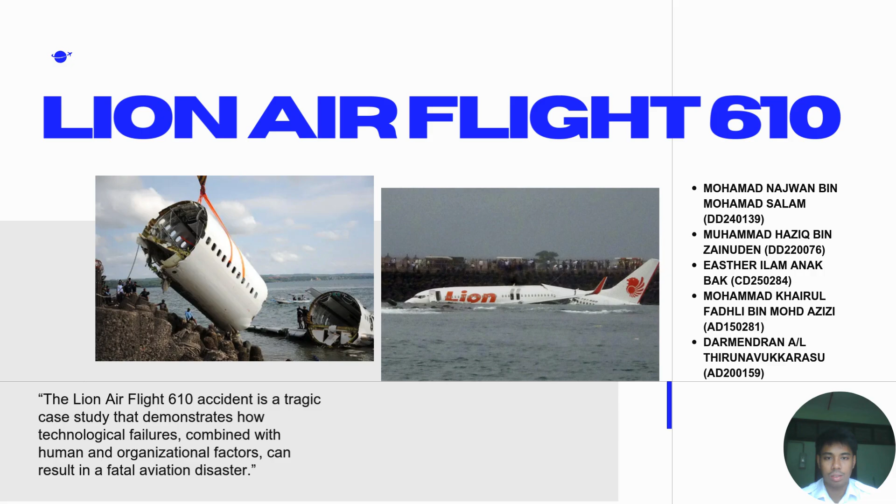DD220076. My group will be presenting about an aircraft incident related to aircraft system malfunction or problem. The topic we will discover is the Lion Air Flight 610.

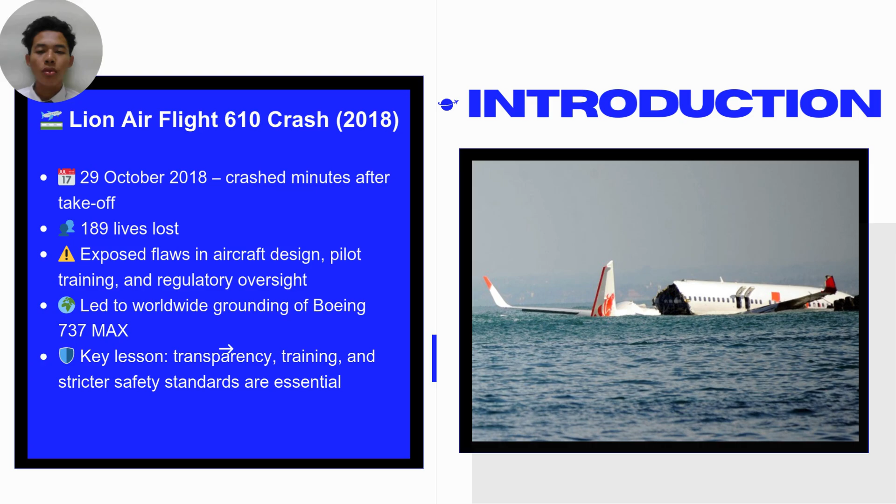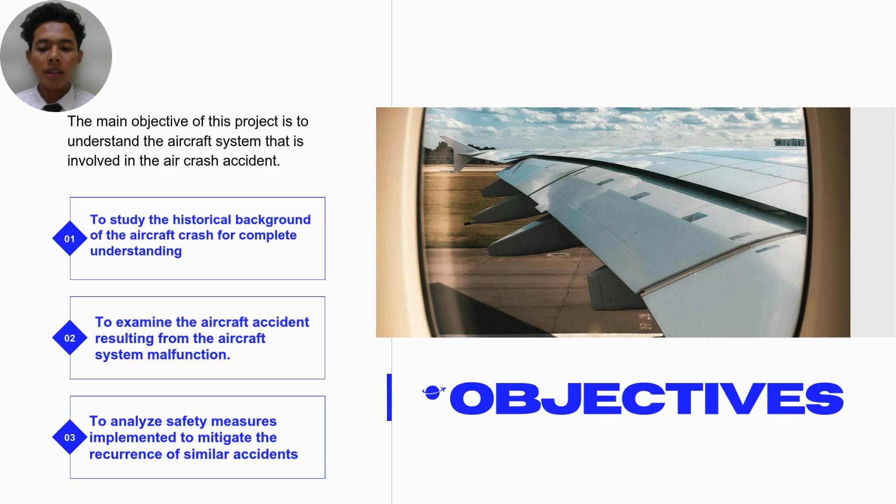The purpose of this project, or the objective, is to understand the aircraft system involved in this aircraft crash incident. First, to study the historical background of the aircraft crash for complete understanding. Secondly, to examine the aircraft accident resulting from aircraft system malfunction. And lastly, to analyze safety measures implemented to mitigate the recurrence of similar incidents in the future.

Now we're talking about the history of the airline, which is Lion Air. For the airline background, it was founded in 1999 and operations began in 2000. It is a low cost carrier (LCC), and it was one of the biggest low cost carriers in Southeast Asia. Its network went from high frequency point-to-point routes, focusing primarily on domestic with some regional and international routes.

Let's talk about the safety and operational history pre-Flight 610. Lion Air had recorded multiple safety related incidents: runway excursions, hard landings, and recurrent technical issues, especially in the AOA sensor. These incidents drew attention from multiple aviation authorities, raising concern over maintenance quality, crew training standards, organizational safety culture, and regulatory compliance. Compliance was maintained, but operational risks persisted.

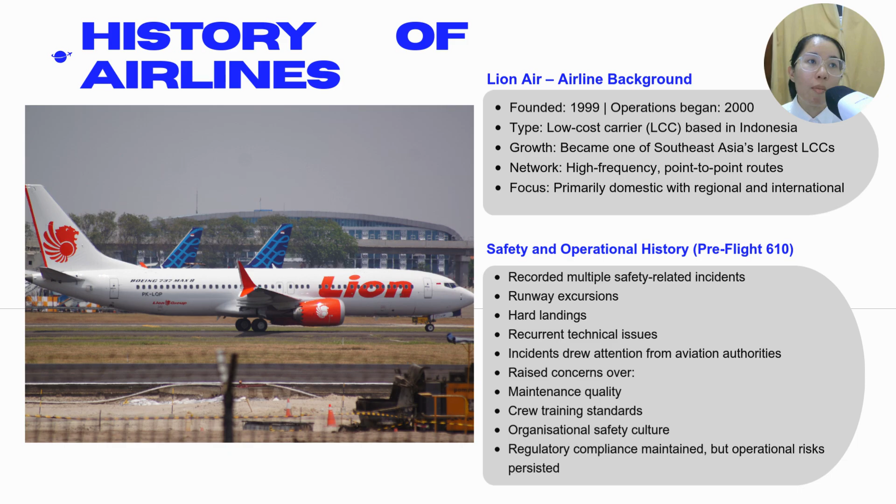Speaking of the AOA sensor, the angle of attack sensor, it was replaced prior to the accident. Before the accident, the AOA sensor was already experiencing multiple technical issues, so they replaced it with what they thought was a new one. It was actually an old one that was refurbished. The replacement sensor was supplied by Xtra Aerospace from the US, and investigation found the sensor was likely miscalibrated before installation.

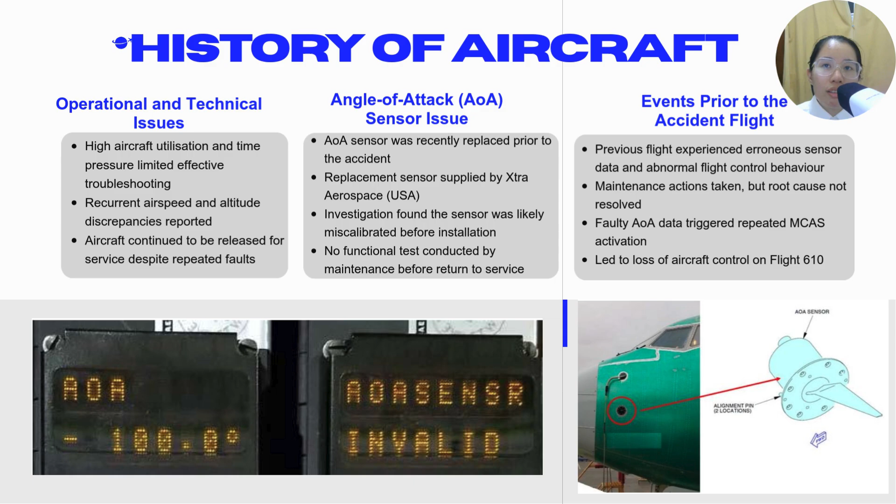When they were supposed to constantly check the sensor and calibration because of too many faulty issues. Now, events prior to the accident flight: the previous flight experienced erroneous sensor data and abnormal flight control behavior. Maintenance actions were taken, but the root cause was not resolved. They just tried to fix it overnight and ignored a lot of steps to ensure the AOA sensor was fully functional. The faulty AOA data triggered repeated MCAS activation, which led to the loss of aircraft control on Flight 610.

For this section, I will discuss the main causes of the Lion Air Flight 610 crash, focusing on the system failure, human factors, and organizational weaknesses.

The first and initiating cause of this crash was the faulty angle of attack, or AOA sensor. The AOA sensor installed on the aircraft had been incorrectly calibrated after maintenance. As a result, it continuously transmitted false high angle of attack data to the aircraft system. This incorrect information misled the flight control system into believing the aircraft was approaching an aerodynamic stall, even though it was flying normally. The faulty sensor input became the starting point of the accident sequence.

This leads to the malfunction of the Maneuvering Characteristics Augmentation System, or MCAS. This system was designed to automatically command nose down stabilizer trim when a high angle of attack is detected. Due to the faulty AOA sensor, MCAS activated repeatedly and unnecessarily, each activation trimming the aircraft nose down and forcing the pilots to continuously counteract the system. Despite their efforts, MCAS kept reactivating, progressively reducing the aircraft's controllability and contributing directly to the crash.

Another critical cause of this crash was a single sensor dependency in the system design. MCAS relied on the output of only one AOA sensor at a time, without cross-checking data from the second sensor. This lack of redundancy meant a single sensor failure was enough to trigger repeated incorrect system actions. In aviation safety design, critical systems are expected to be fault tolerant, and this absence of redundancy significantly increases the risk of catastrophic failure.

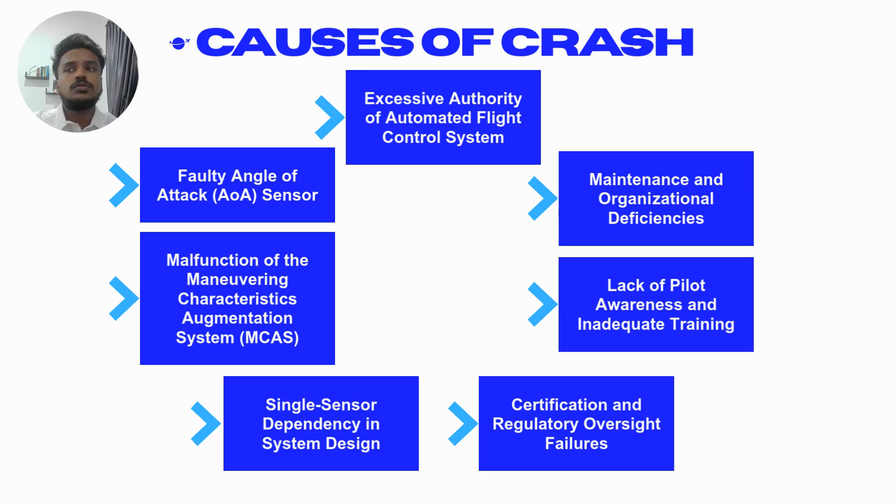Next, we will go through the actions, regulations, or safety practices that were ignored or violated during the crash.

The first one is MCAS omission from the manual and training, which is one of the most significant failures. Boeing did not disclose the existence and detailed operation of MCAS to the pilots. According to the investigation, pilots flying the 737 MAX were unaware of the system. Since they didn't know the system existed in the first place, they could not interpret or deal with its behavior effectively during multiple inadvertent activations. They didn't know how to react when the system took control of the aircraft. This omission violated the principle that pilots must be fully informed of critical flight control systems and how to handle their failures.

The next one is over-reliance on a single angle of attack sensor. The original MCAS design relied on just one AOA sensor, where safety standards generally require redundancy for systems whose failure could lead to catastrophic outcomes. Yet MCAS was certified without such redundancy. As we all know, in aircraft construction redundancy is important because if one system fails, there is a backup system that can activate to prevent a crash or serious incident. The certification process accepted this despite widely understood safety engineering practices favoring multiple sensors for critical functions. So this is clearly a violation.

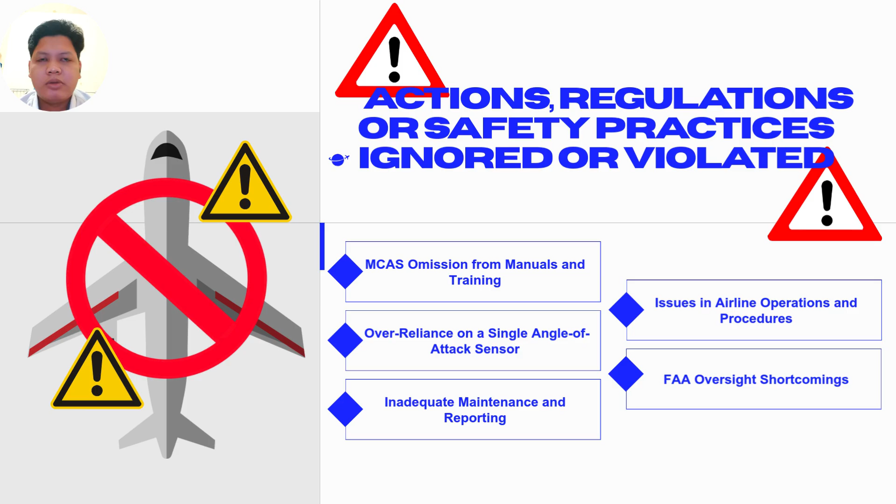The last one is FAA oversight shortcomings, where a review report found that FAA's oversight during the original 737 MAX certification process was inadequate. In particular, the agency delegated much of the certification work to Boeing through its Organization Designation Authorization (ODA) program, and the FAA didn't fully understand MCAS behavior, even though engineers eventually realized its potential hazard only after the crash. So there's also a part of the FAA that caused the crash, where the FAA did not fully understand the MCAS behavior, and yet they still approved this aircraft to be certified for operation.

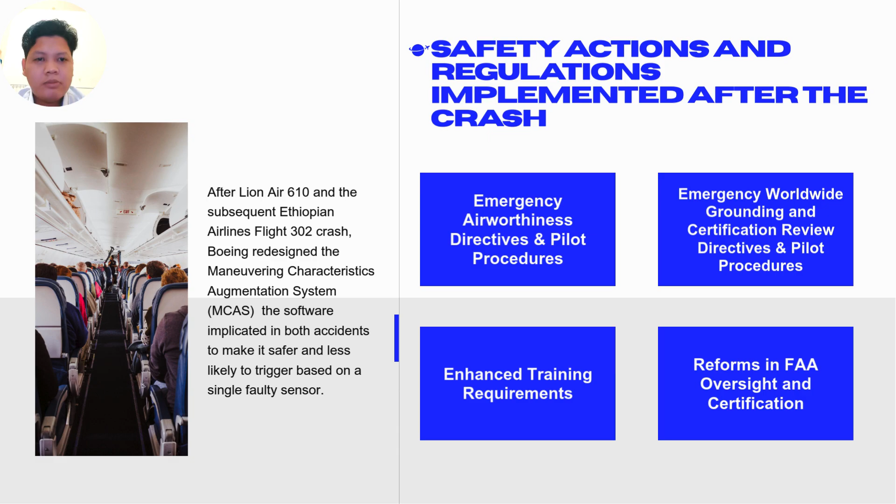The next one is safety action and regulation implemented after the crash. After the Lion Air Flight 610 and the subsequent Ethiopian Airlines Flight 302 crash, Boeing redesigned the Maneuvering Characteristics Augmentation System, MCAS, the software implicated in both accidents, to make it safer and less likely to trigger based on a single faulty sensor.

The MCAS now compares inputs from two angle of attack sensors and will not activate if they disagree. An angle of attack disagreement indicator was added for pilot awareness, so they're aware if there is a disagreement between both angle of attack sensors. Also, MCAS will only activate once per event and has limits that pilots can override more readily. These changes were certified by regulators before the 737 MAX was returned to service.

Next is the Emergency Airworthiness Directive and pilot procedures. Shortly after the crash, the FAA issued an Emergency Airworthiness Directive requiring operators to adopt procedures addressing uncommanded nose-down trim, the runaway stabilizer condition MCAS could cause. Boeing and regulators also issued flight crew advisories updating flight manuals and checklists, including how to recognize and respond to MCAS-related issues, like the runaway horizontal stabilizer.

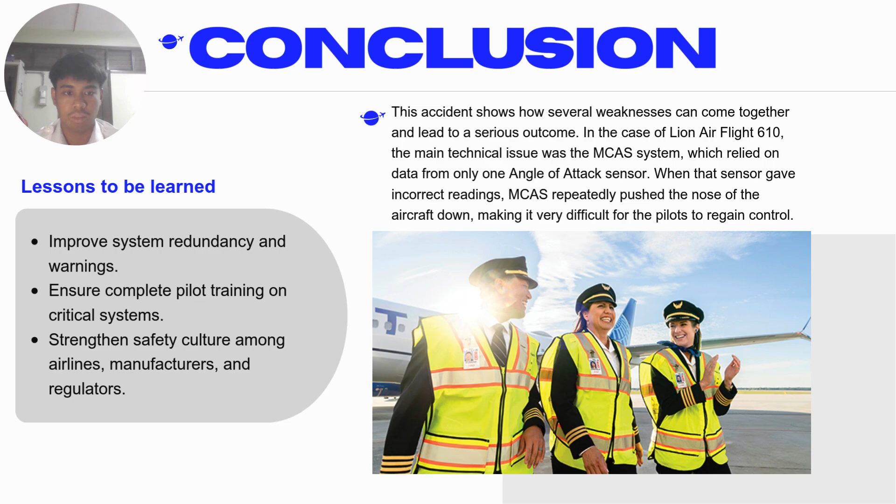In conclusion, this accident highlights that aviation safety depends not only on technology but also on training, communication, and shared responsibility across the entire aviation industry.